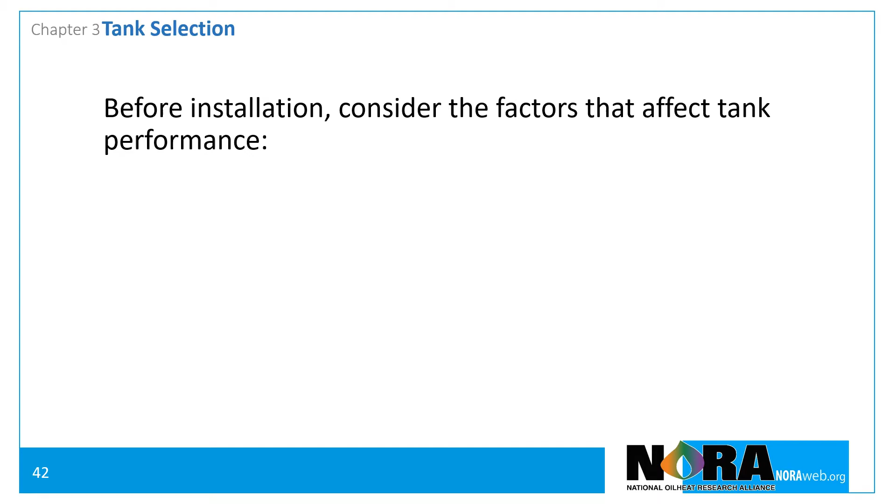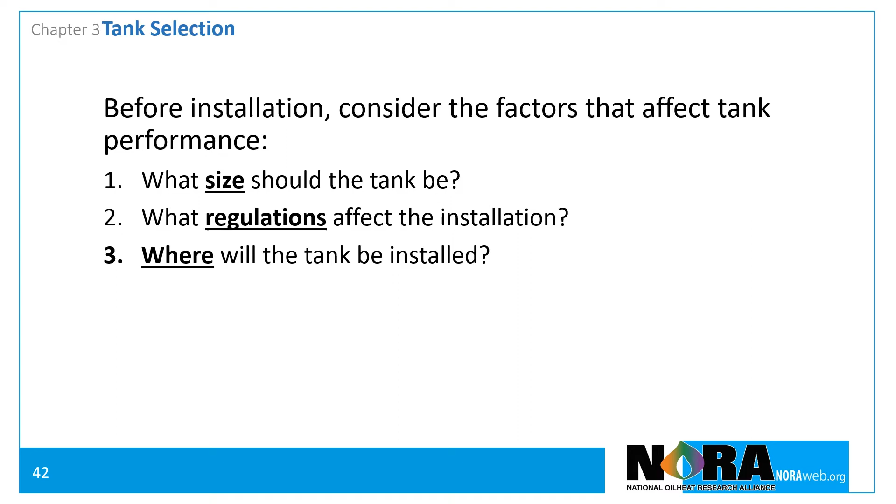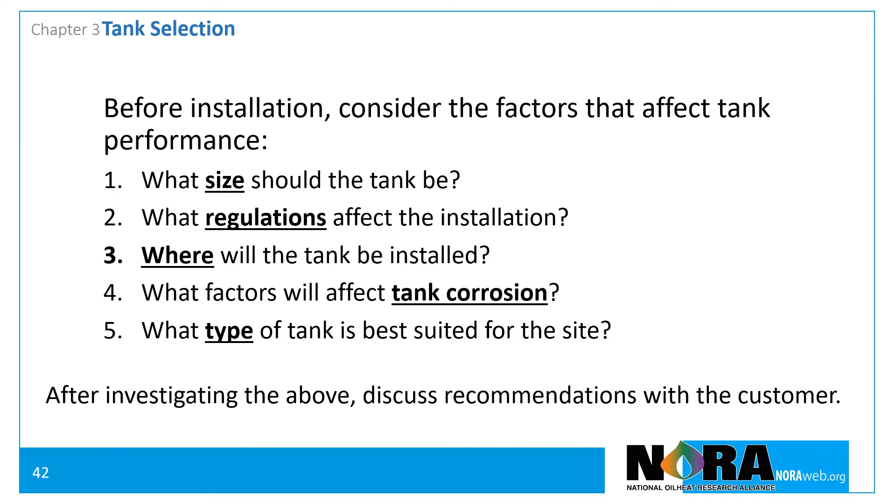Before installing a new or replacement tank, consider the factors that will affect the tank's performance over its service life. These may include what size should the tank be, what regulations affect the installation, where will the tank be installed, what factors will affect corrosion, and what type of tank is best suited for the site. After investigating each of these factors, discuss the options and your recommendations with the customer.

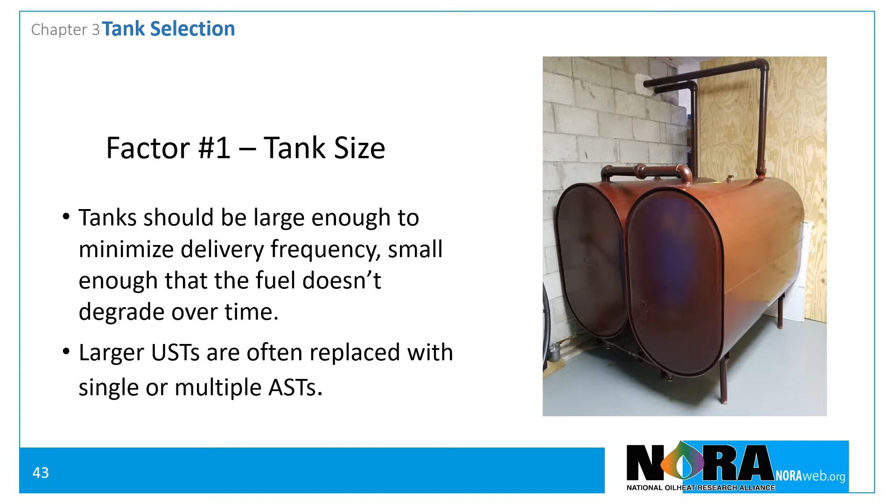Regarding factor number 1, tank size. Tanks should be large enough to minimize delivery frequency, and yet small enough so that the fuel in storage doesn't degrade over time. Larger underground storage tanks are often replaced with single or multiple above-ground storage tanks. Smaller tanks require more frequent deliveries, but they reduce the aging of the fuel.

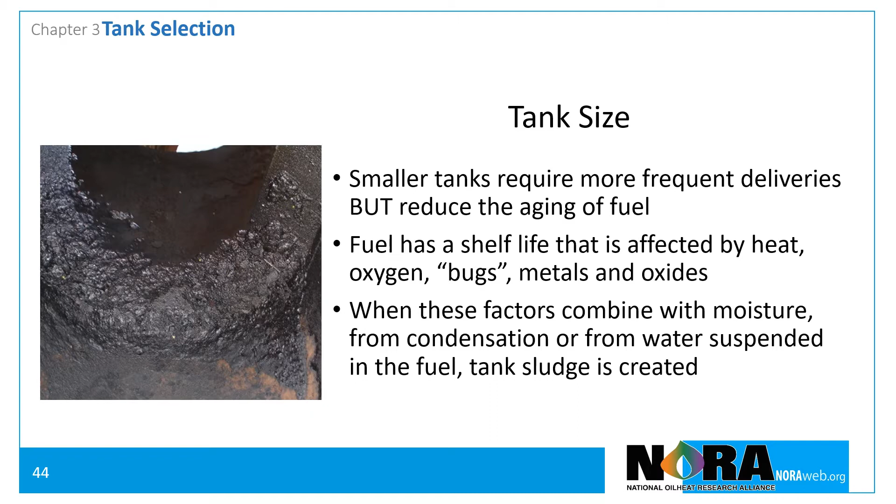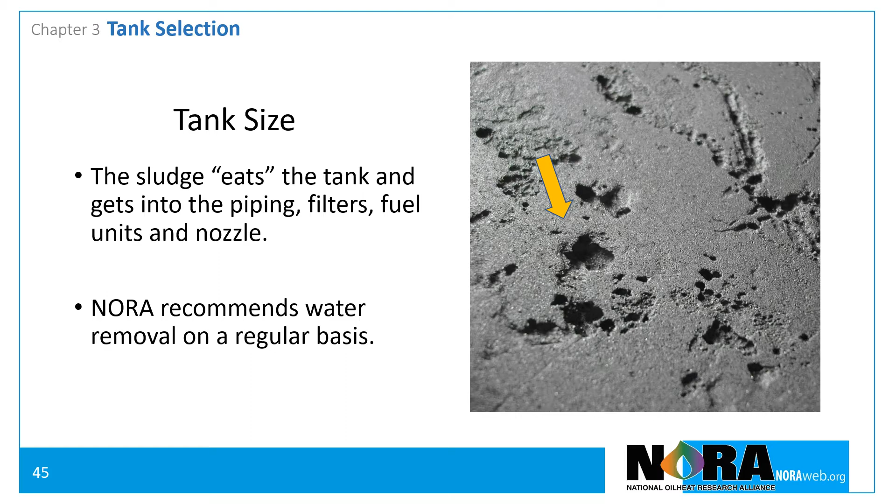Fuel has a shelf life that is influenced by heat, oxygen, microorganisms, metals, and oxides. When these influences combine with moisture, an environment for creating tank sludge is created. This sludge not only causes tank corrosion, it can get into the piping, the filters, the pumps, and the nozzle, causing operational problems. This is the primary reason regular removal of accumulated water is recommended throughout this course. Tank size should reflect the balance between delivery frequency and the time the fuel is stored.

NORA suggests that the best way to properly size a fuel storage tank is to divide the annual consumption by 3. For example, if a customer is expected to consume 750 gallons or less, 750 divided by 3 equals 250. A tank no larger than 275 gallons is recommended. If a customer is expected to consume 1,000 gallons, 1,000 divided by 3 equals 333. So a 275 or a 330 gallon tank will suffice.

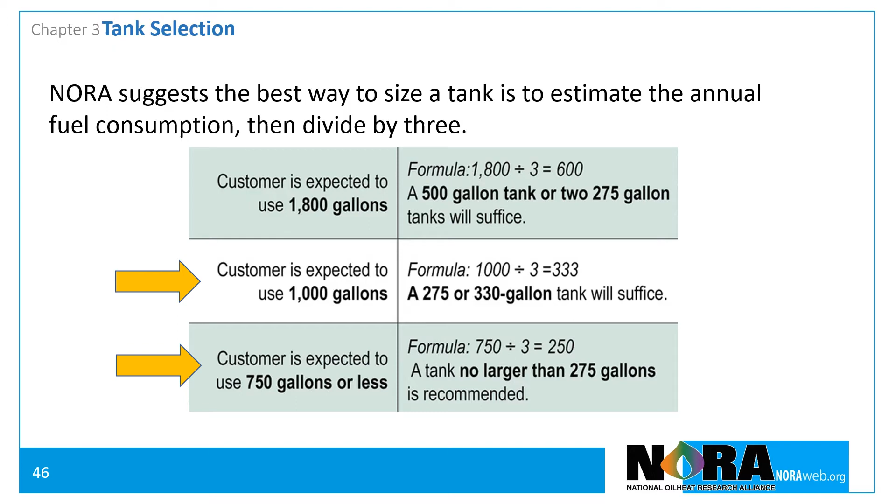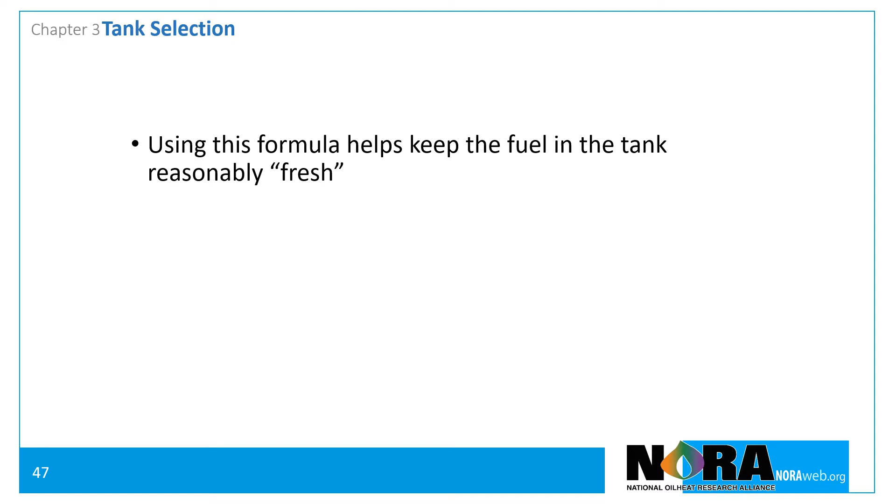Using this formula helps assure the fuel in the tank is reasonably fresh and resources are not challenged by excess deliveries. Keep in mind that even with this method of sizing, at any given time, some of the fuel in the tank will be over a year old. In the case of underground storage tanks, or an above-ground storage tank with the fuel supply line piped through the top, a portion of the tank contents, fuel residues, and oxidized fuel may be much older.

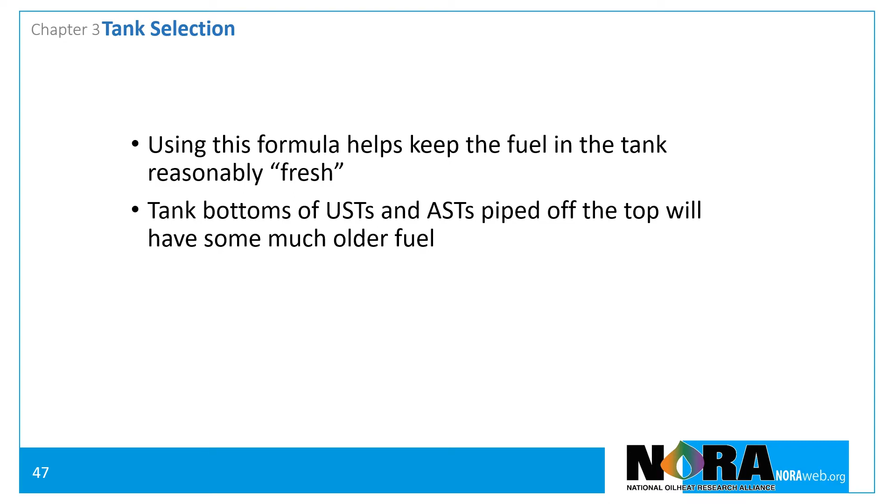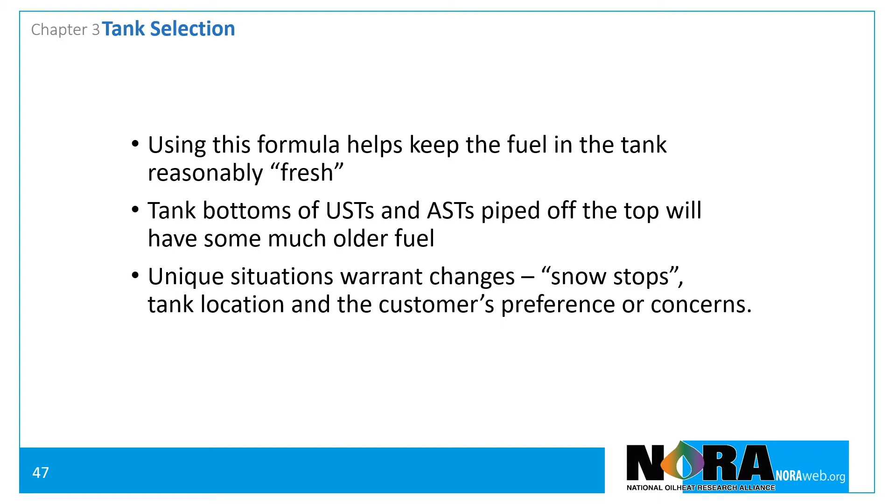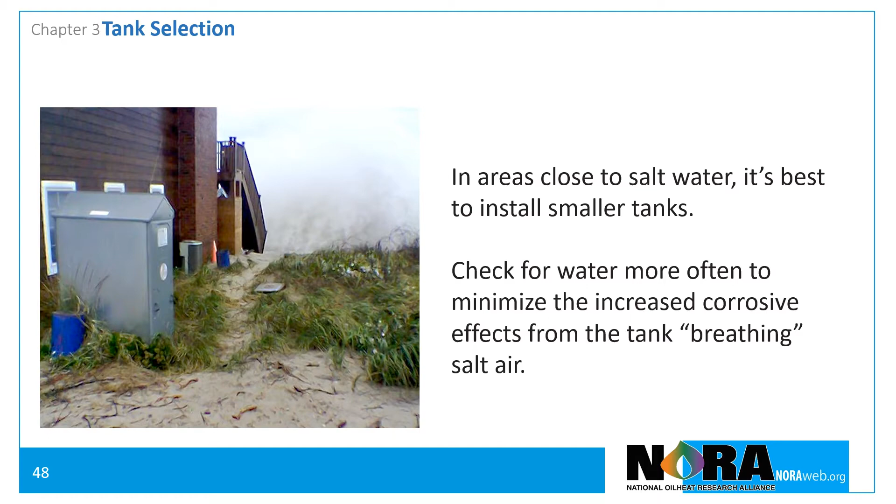Of course, there are unique situations which may warrant changes to this formula, including locations of the tank and the customer's preferences or concerns. In areas close to salt water, it may be prudent to install even smaller tanks and monitor for accumulations of water more frequently, in an effort to minimize potentially increased corrosive effects from the tank breathing salt air. The key is to balance delivery frequency with reasonable product turnover so aging of the fuel is minimized.

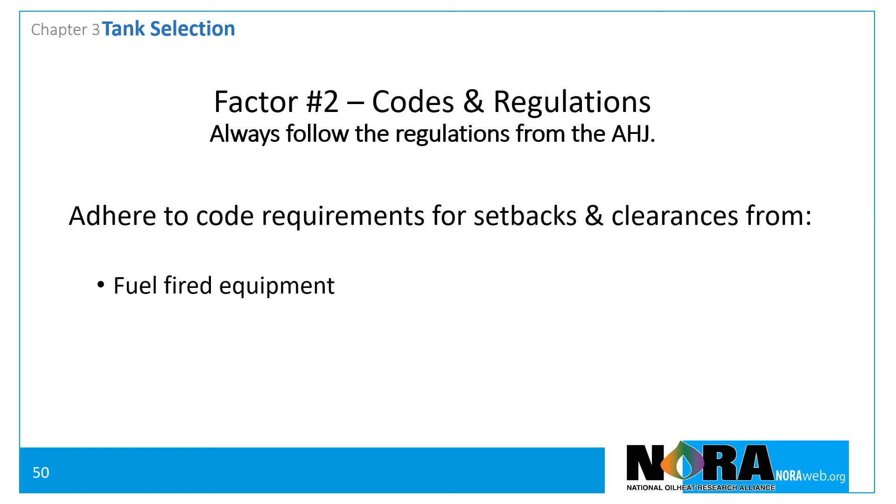Let's take a look at the second factor in choosing the right tank, codes and regulations. It is important to always follow the regulations from the authority having jurisdiction. Pay particular attention to required setbacks and clearances from fuel-fired equipment, including gas dryers, stoves, etc., property lines, buildings, including doors and windows, air intakes, gas and electric service ports, and combustion exhausts.

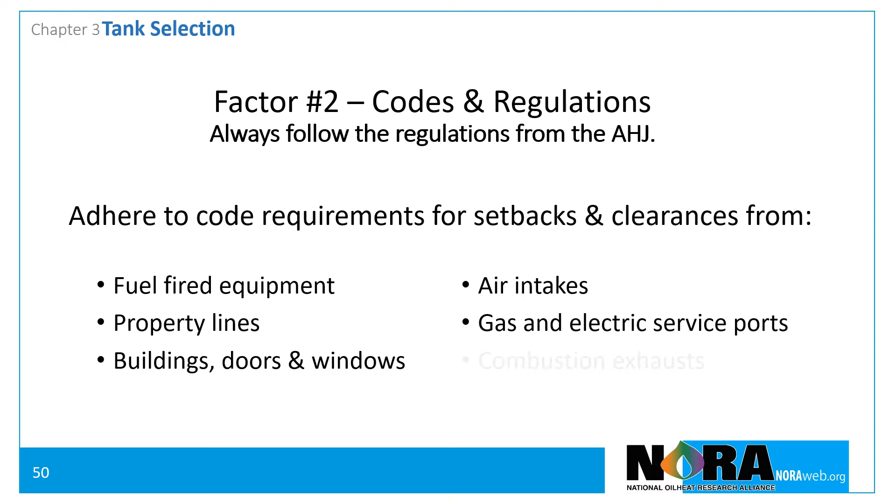The third factor in tank selection is its location. Tanks can be installed indoors or outdoors, and outdoor tanks can be installed either above the ground or underground. But where space and applicable regulations allow, NORA believes the benefits associated with indoor installations support a policy of installing tanks indoors whenever possible. The following things should be considered when selecting a location for a new or replacement tank.

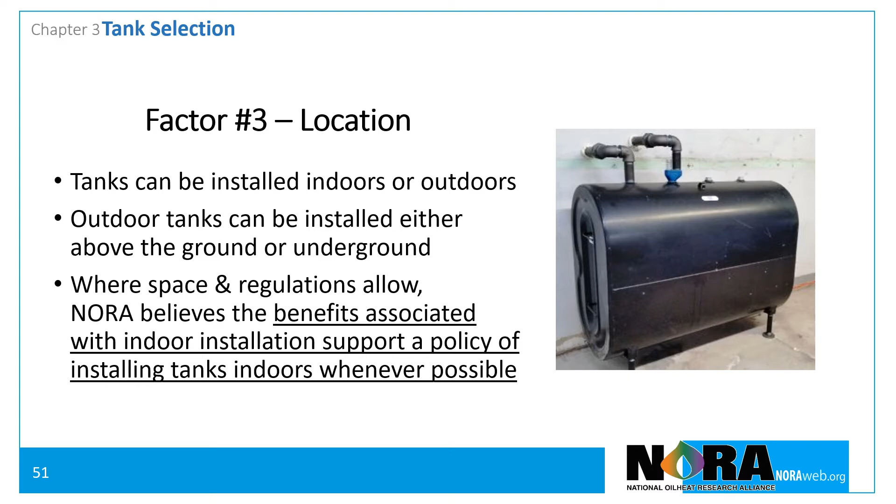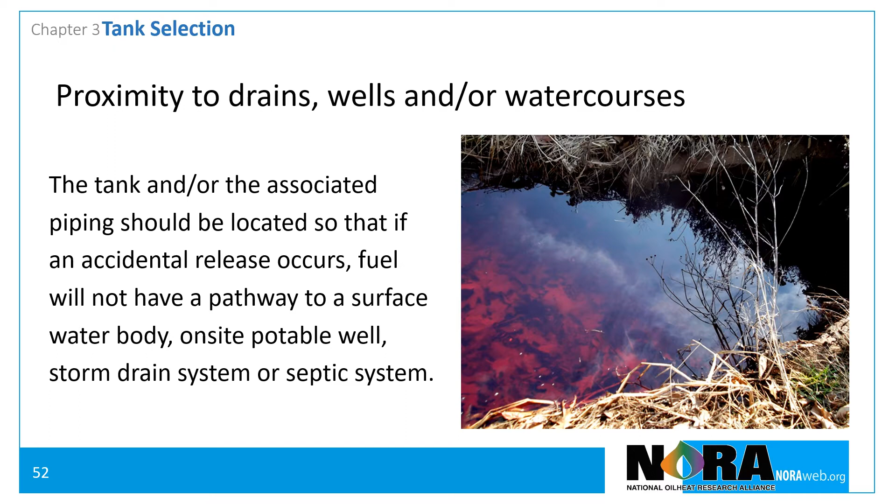The tank's proximity to drains, wells, and/or water courses. The tank and the associated piping should be located so that should an accidental release occur, fuel will not have a pathway to a surface water body, a potable well, a storm drain system, or a septic system.

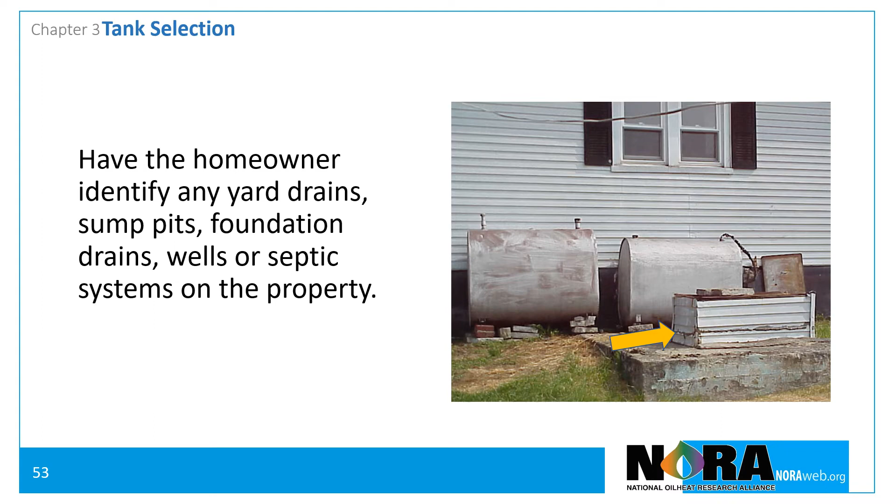Have the homeowner identify any yard drains, sump pits, foundation drains, wells, or septic systems on the property. In the picture here, the tank has a number of issues, and the white rectangular box on the concrete slab is a water well. These tanks should be replaced, and the new ones should be relocated and piped properly.

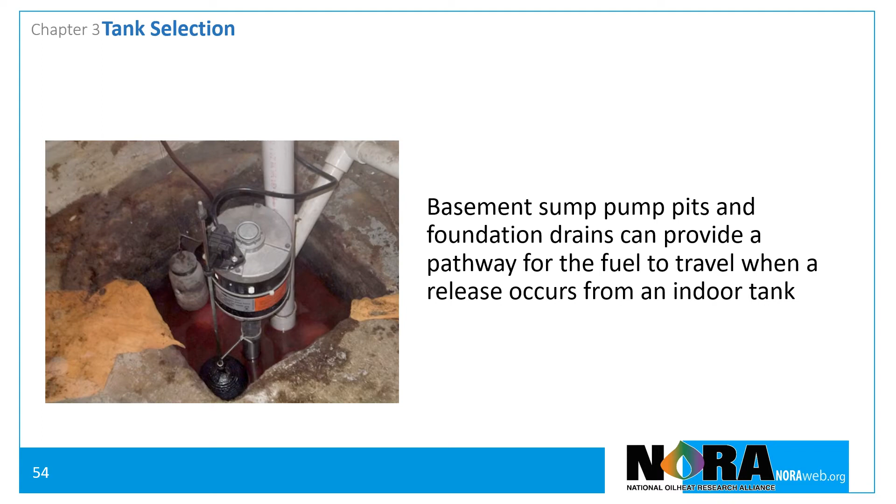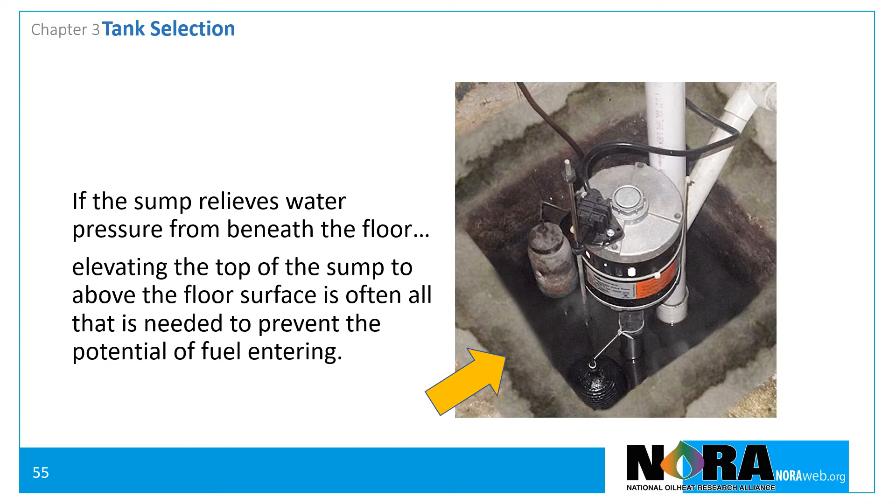Basement sump pump pits and foundation drains can provide a pathway for the fuel to travel when a release from an indoor tank occurs. Oftentimes, if the pump is relieving water pressure from beneath the floor, elevating the top of the sump to above the floor surface is all that is needed to prevent the potential of fuel entering.

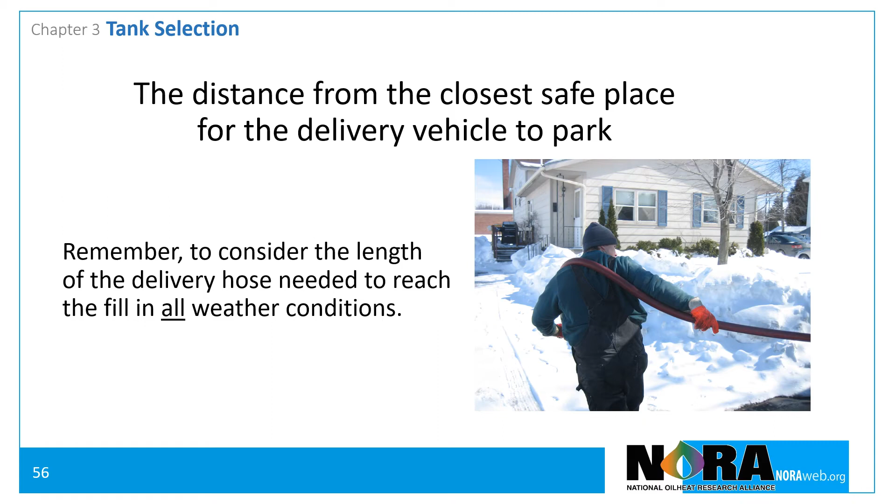A location criteria that is often overlooked is the distance from the closest safe place for the delivery vehicle to park. Remember to consider the length of the delivery hose and that the hose must be able to reach the fill in all weather conditions. Select a location where the tank and piping won't be subject to damage from weather and other physical damage.

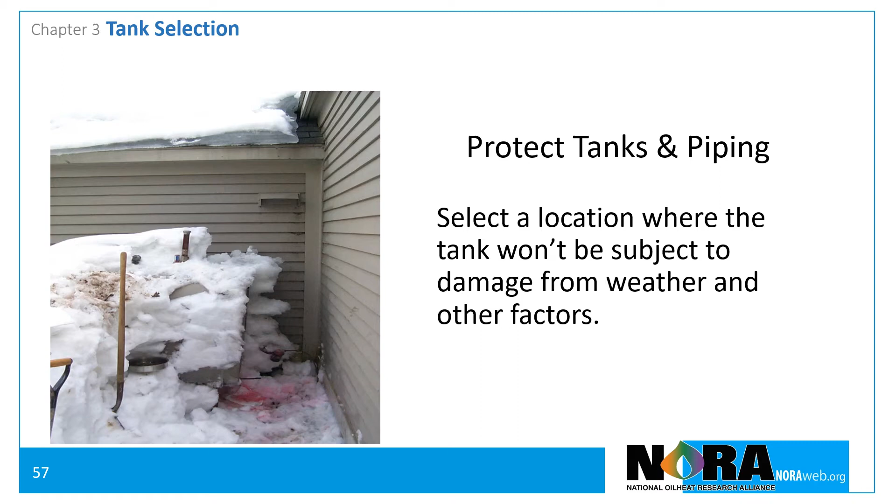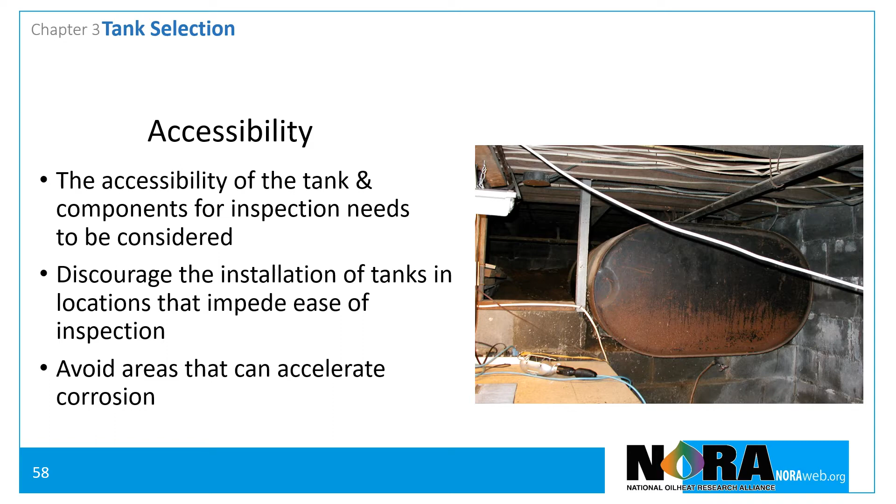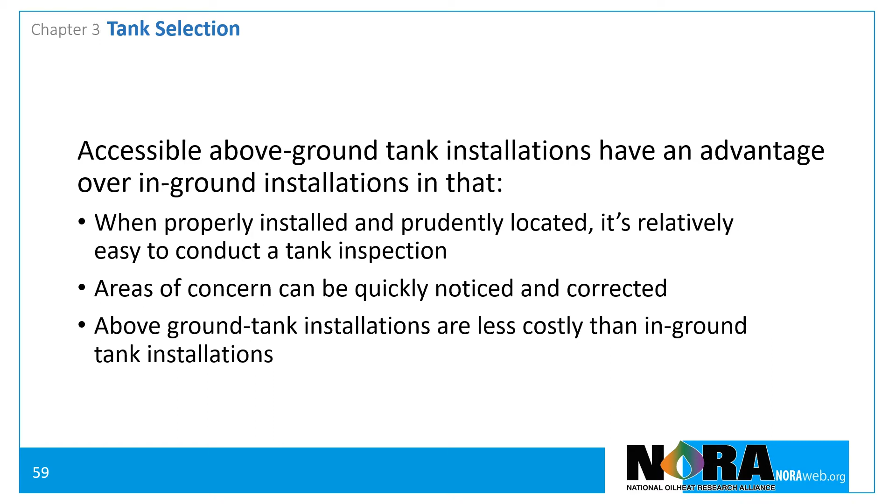The accessibility of the tank to facilitate inspection and servicing needs to be considered. Areas that may present the risk of accelerated corrosion should be avoided. Accessible above-ground tank installations have an advantage over in-ground installations in that it's relatively easy to conduct tank inspection, concerns can be quickly noticed and corrected, and above-ground tank installations are less costly than in-ground tank installations.

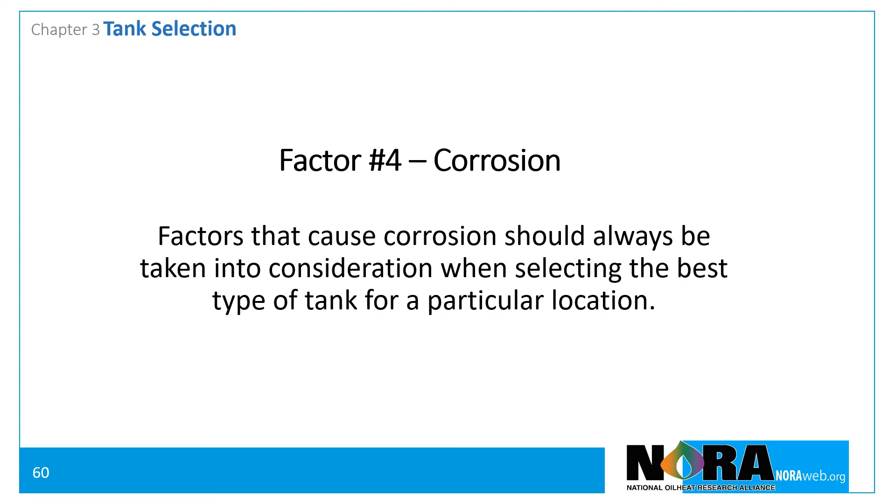The fourth factor in tank location is the potential for corrosion. Factors that cause corrosion should always be taken into consideration when selecting the best type of tank for a particular location. The National Fire Protection Association requires that underground storage tanks be protected from exterior corrosion by a properly designed,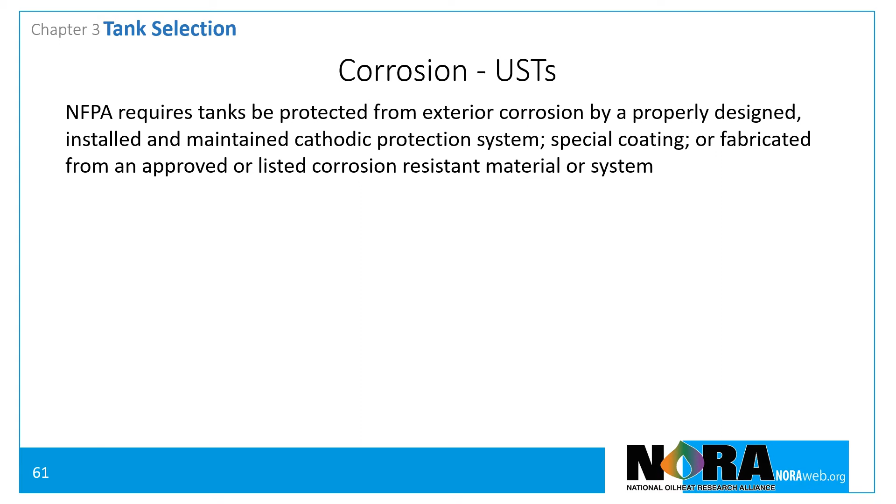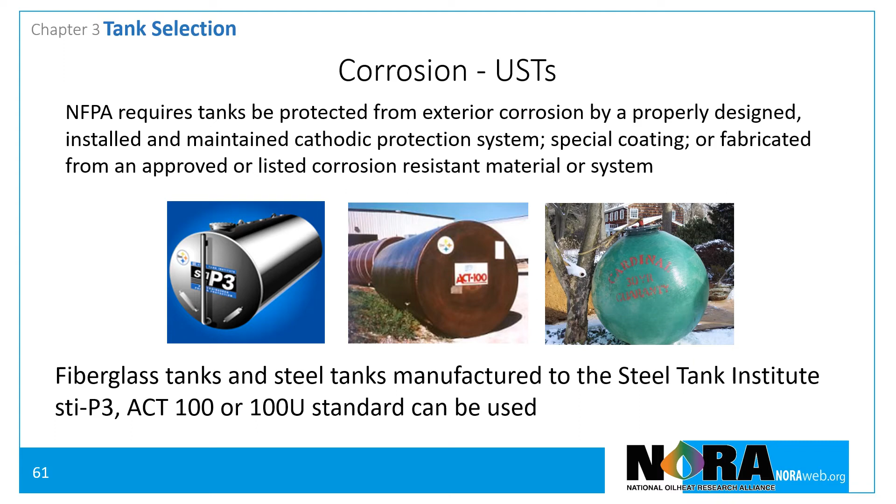installed, and maintained cathodic protection system, special coating, or fabricated from an approved or listed corrosion-resistant material or system. Fiberglass tanks and steel tanks manufactured to the Steel Tank Institute's STI-P3, ACT-100, and ACT-100U standards meet the requirement.

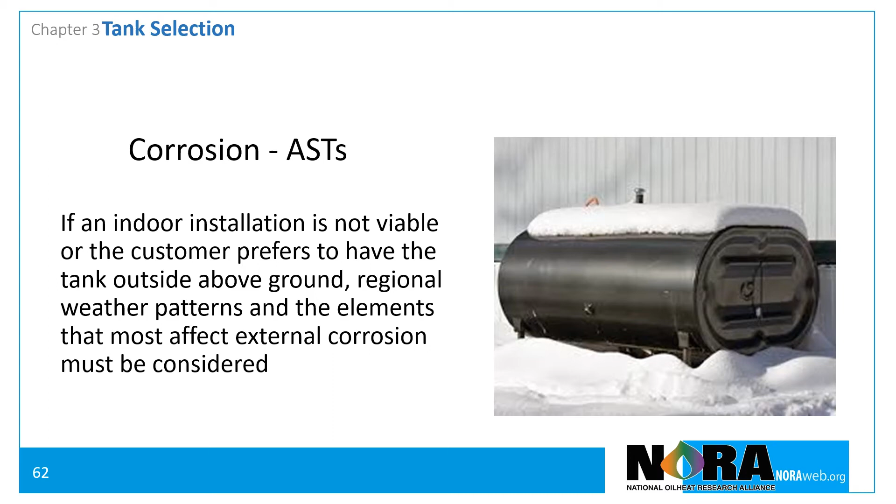If an indoor installation is not viable, or the customer prefers that an above-ground storage tank be installed outside, the location should be based on regional weather and the elements that most affect external corrosion. It's best to situate the tank where effects of radical temperature change can be avoided. A shady spot that has some protection from weather is ideal.

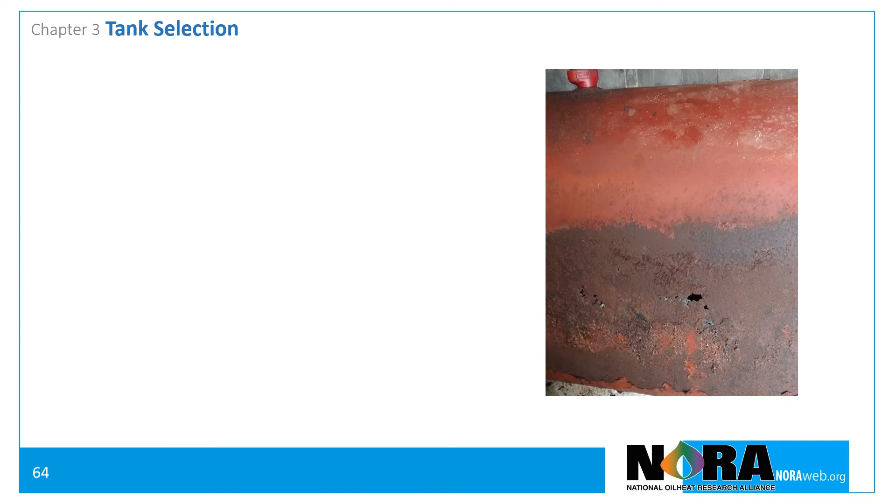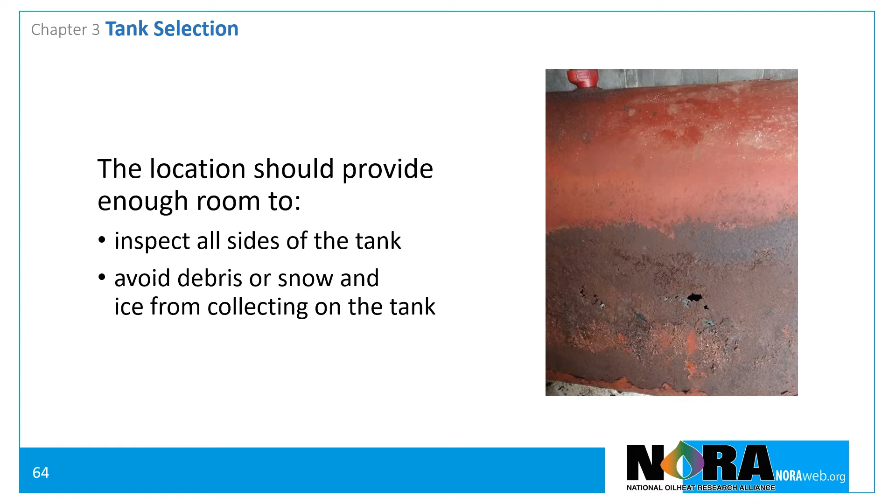The selected location should provide sufficient room to inspect all sides of the tank, sufficient room to avoid debris or snow and ice from collecting on the tank, and sufficient access to facilitate keeping the area beneath the tank free of debris. The tank in this picture was installed right against a wall.

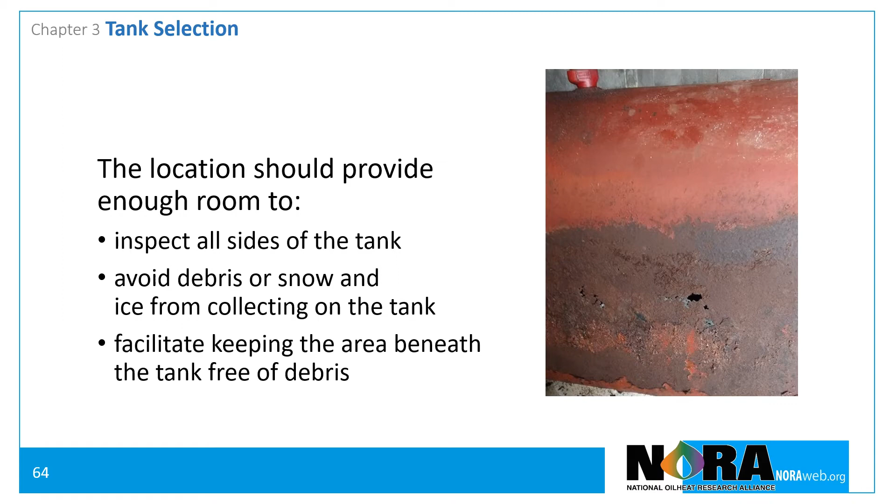While above-ground storage tanks normally corrode from the inside out, this tank was the exception to the rule because of an improper installation. In some instances, suggesting the customer consider having the tank installed within an enclosure, or recommending the customer consider a non-metallic tank system can help minimize the risk of premature tank obsolescence.

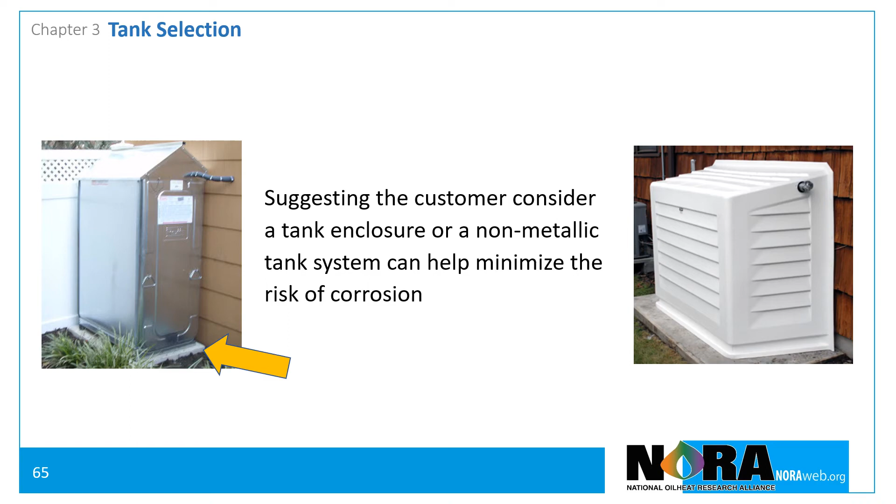The polyethylene steel tank in this picture appears to have some issues. The manufacturer's instructions say that the base should extend at least 6 inches beyond the edge of the tank, and that the tank should be a minimum of 2 inches from all walls to allow for expansion and inspection.

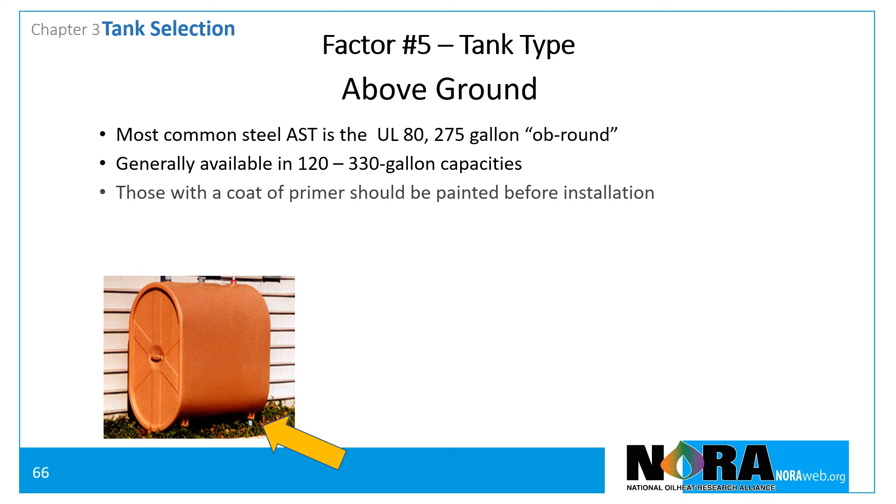Emergency vents are not required for combustible liquids, but UL142 tanks have a label attached that says, "Do not plug this tapping." Some authorities having jurisdiction have refused to approve installations when UL142 tanks used for fuel have a plug in the 3-inch tapping. There is no advantage to using a UL142 instead of a UL80, so it's advisable to avoid installing them. And the cylindrical tanks are also available.

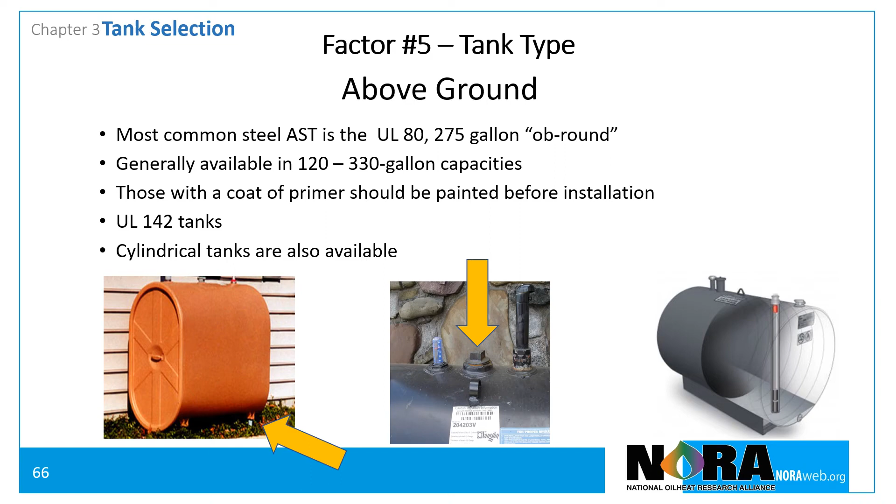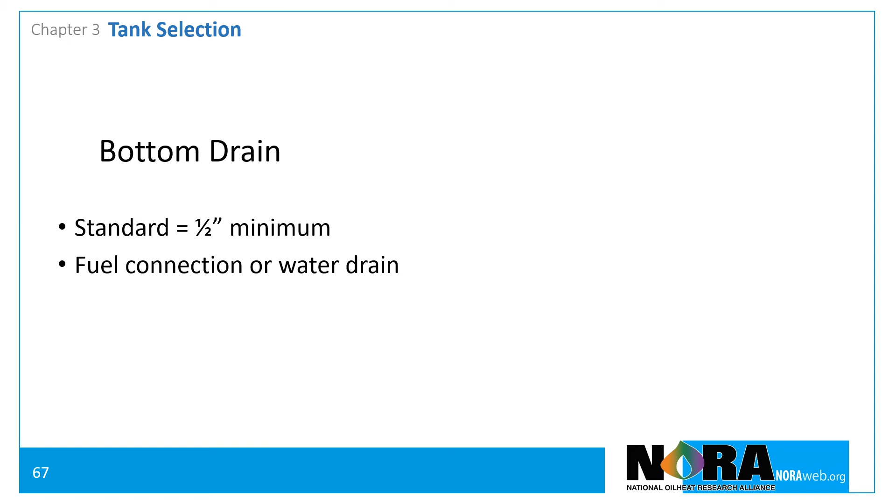UL80 tanks typically have a 1/2-inch outlet at the bottom of the tank. This tapping is normally used for the fuel supply connection. If it is not used for the fuel supply, it should be piped to facilitate water removal. Merely making the fitting liquid tight by the insertion of a plug defeats the purpose of the design. This image shows a manufacturer's illustration of how this tapping should be connected.

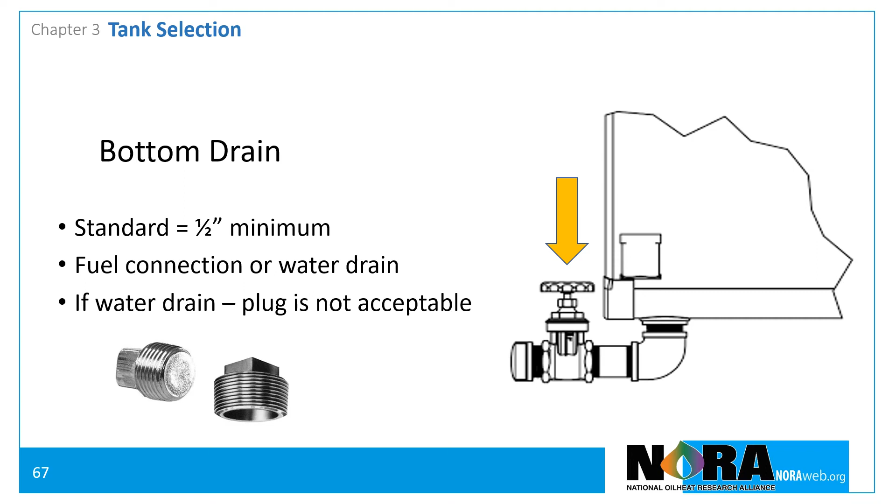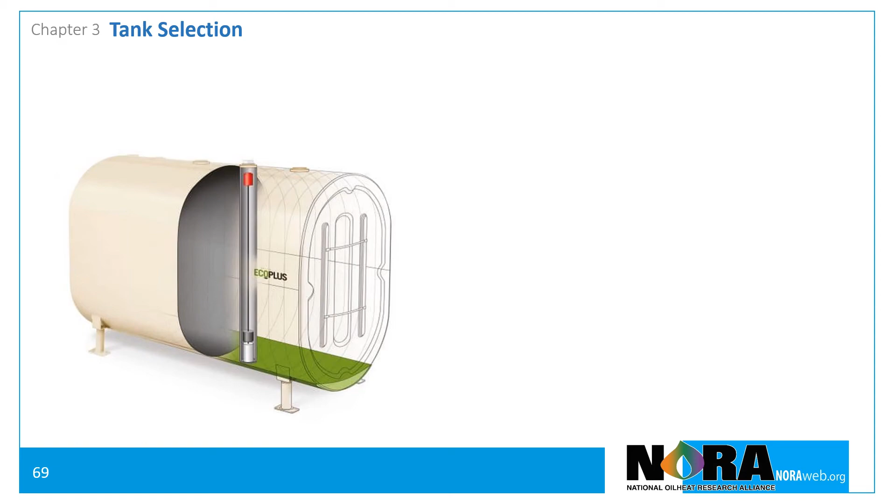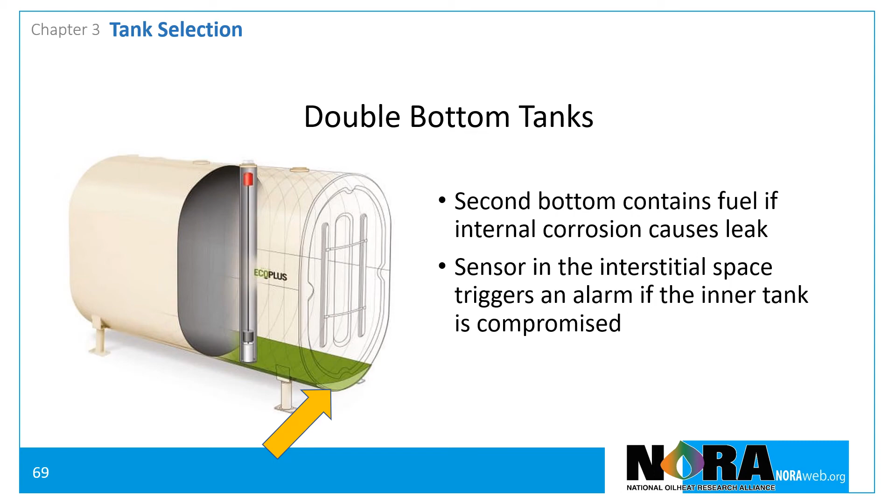Above-ground storage tanks are available with a polyurethane coating to better protect the outside of the tank against rust and corrosion. Another improvement to the UL80 tank is the double bottom tank with leak detection. These tanks have a second bottom to contain a leak should the internal corrosion create a breach of the steel integrity. A sensor installed in the interstitial space triggers an alarm and provides an alert that the inner tank has been compromised.

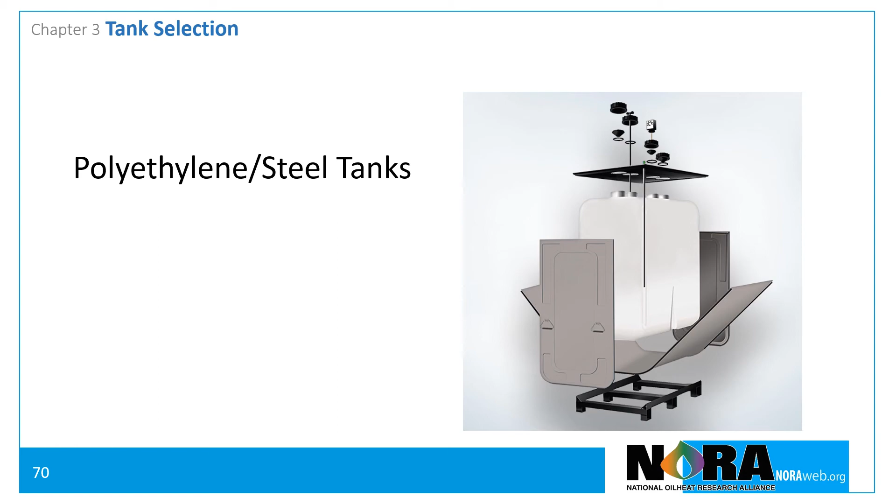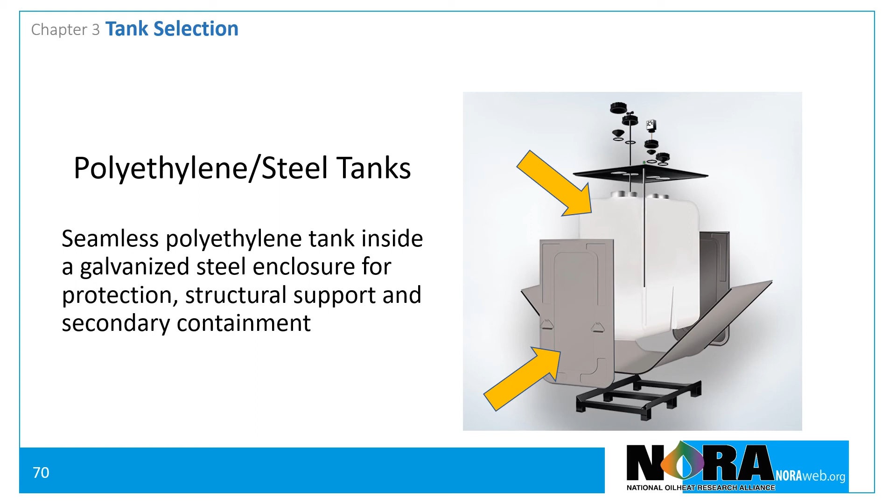Polyethylene steel tanks are comprised of two separate but integral units. The primary internal storage tank is constructed of a seamless polyethylene, which is both compatible with heating fuel and is not electrically conductive. Thus, it is not susceptible to the electrochemical mechanics of corrosion. This tank is within a secondary galvanized steel enclosure which provides structural support for and protection of the polyethylene tank while providing secondary containment should the polyethylene tank leak.

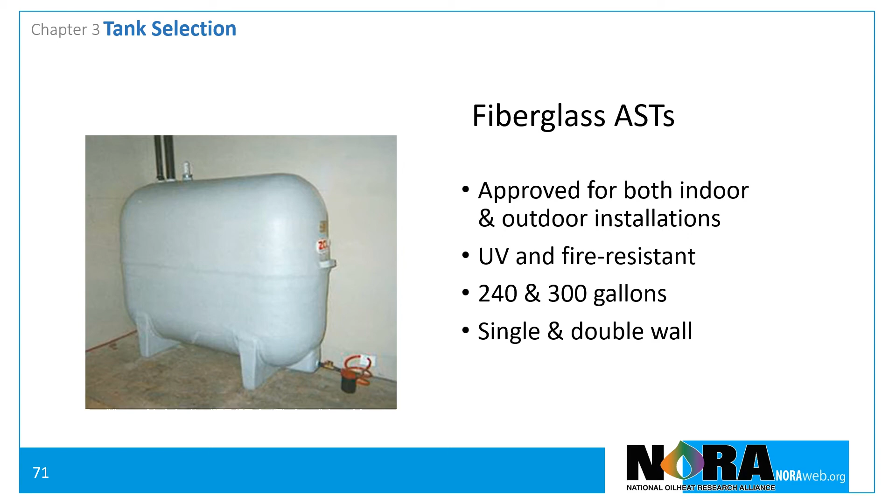And fiberglass above-ground storage tanks are available for both outdoor and indoor applications. These are UV and fire resistant and they do not corrode. They are available in 240 and 300 gallon sizes and both single and double wall construction. The double wall model has a visual sight glass to facilitate inspection.

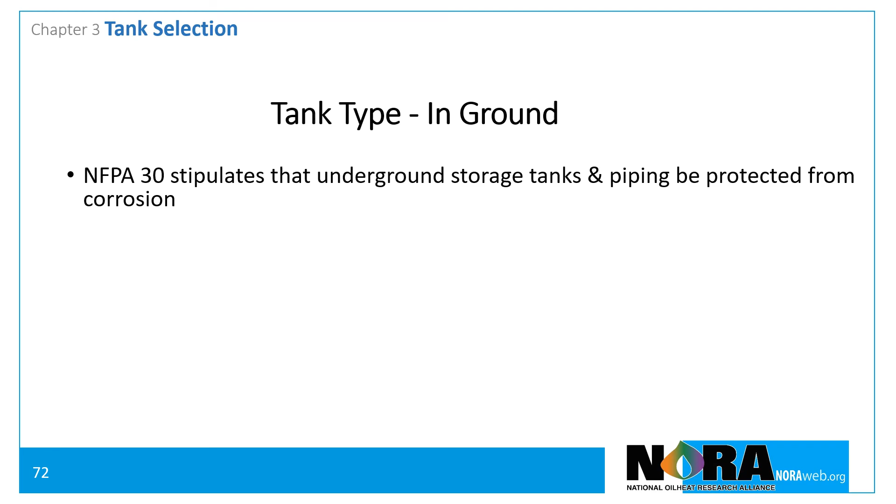This section addresses underground storage tanks that are currently available. NFPA 30 stipulates that underground storage tanks and their piping be protected from corrosion. Unprotected steel tanks are not compliant with the requirements of the major code bodies. While these tanks provide many years of secure storage, age combined with the inability to visually inspect them resulted in tank failures along with other issues that are addressed in this course. For underground installations, NORA recommends 7-gauge STI P3, ACT 100 or fiberglass tanks.

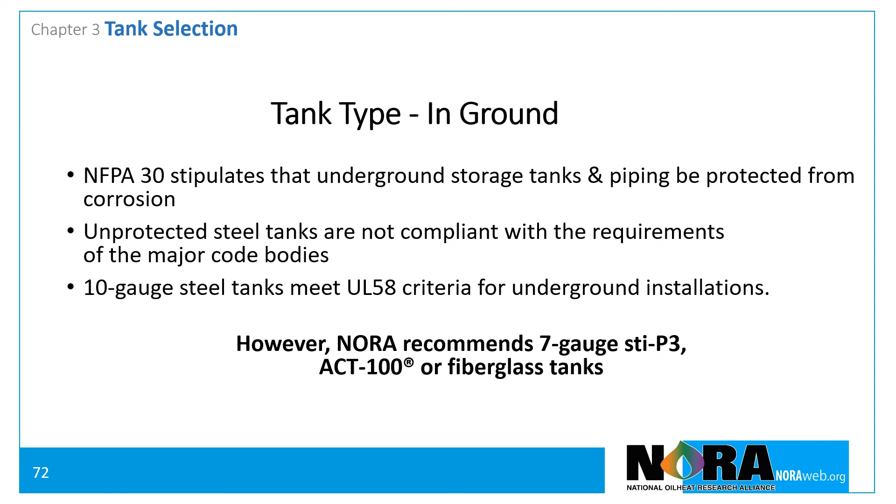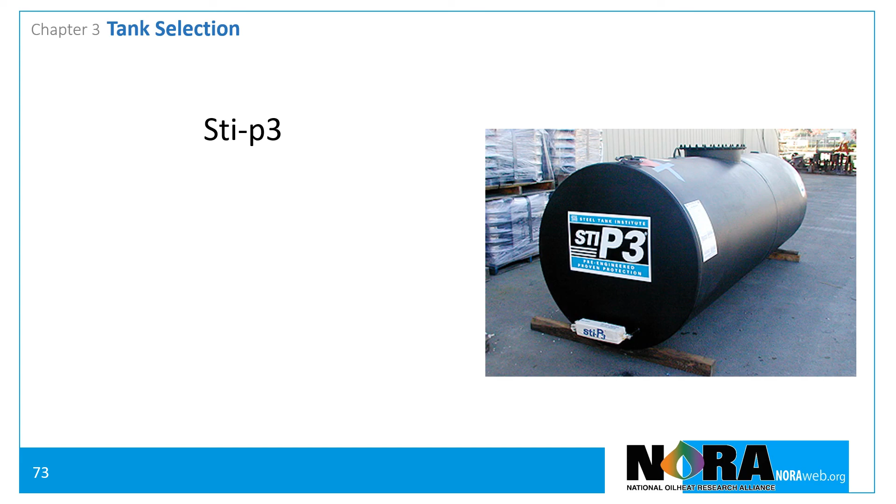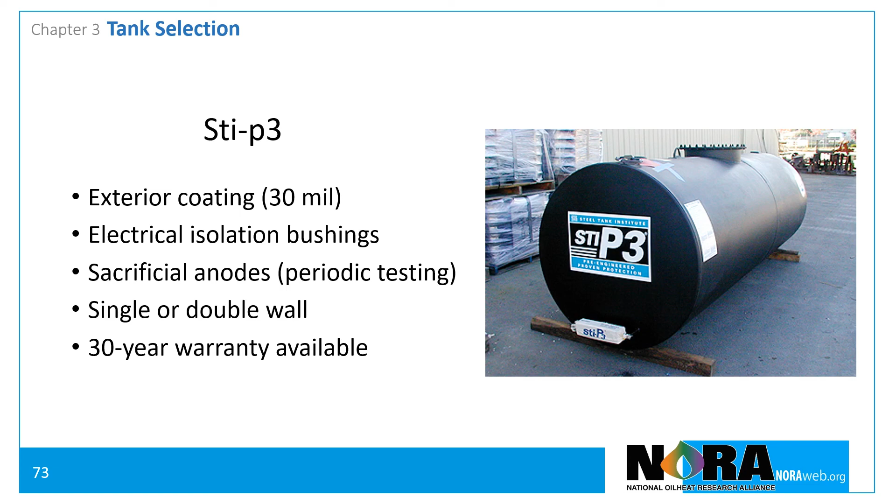STI P3 tanks are steel tanks protected with a factory-installed corrosion protection system designed by the Steel Tank Institute. These tanks feature a 3-part protection system: an exterior dielectric coating, factory-installed electrical isolation bushings in the tank fittings, and sacrificial anodes designed to provide protection of exposed steel in the event of an isolated coating failure. The sacrificial anode protection needs to be tested at installation and periodically thereafter. STI P3 tanks are available in single and double wall configurations, and they carry a standard 10-year warranty against failure due to corrosion, and a 30-year warranty is available.

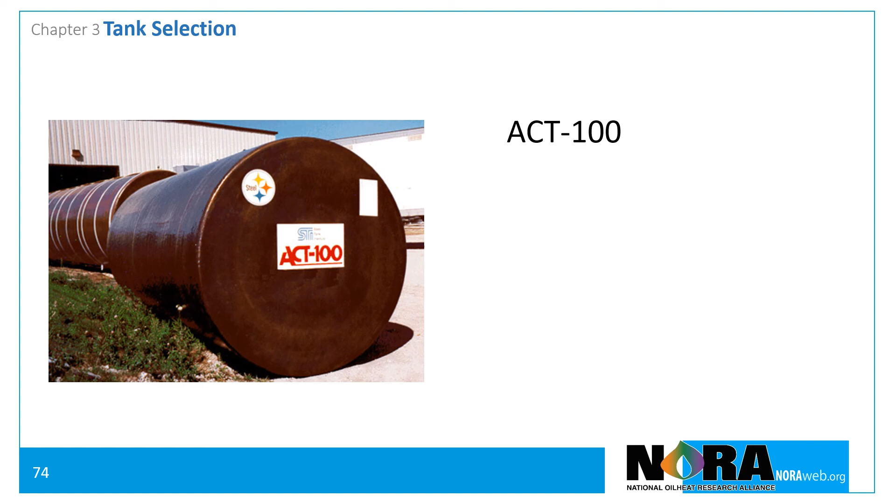The ACT 100 tank uses an advanced multi-component fiberglass reinforced plastic coating applied directly to the exterior of the steel tank to provide corrosion protection. Since the 100 mil high-impact abrasion-resistant coating is significantly thicker than the coating of an STI P3 tank, these tanks do not come equipped with sacrificial anodes. ACT 100 tanks are also available in single or double wall configuration.

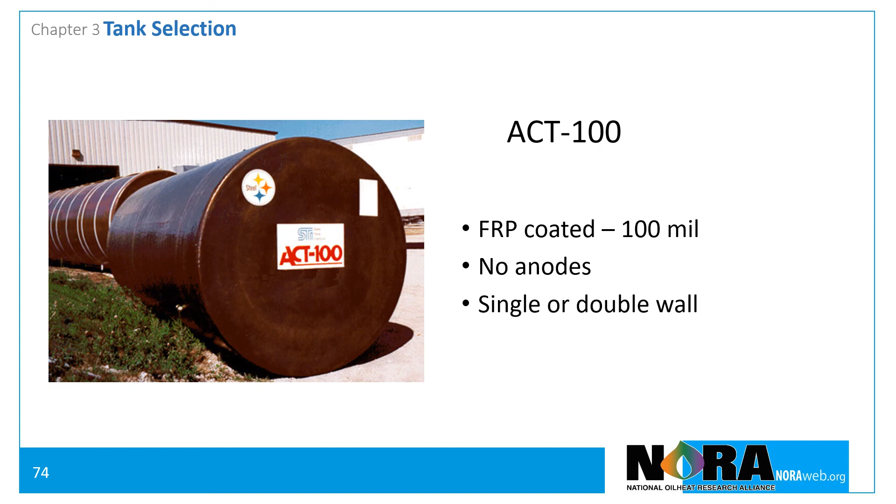The ACT 100U is another version of a coated steel tank. In this case, a 70 mil coating of urethane is used to isolate the steel from the electrochemical mechanisms of corrosion. Like the ACT 100, the tank is not equipped with sacrificial anodes and is reliant on the superior coating for corrosion protection. The urethane is thinner and softer than the FRP coating of the ACT 100, so a protective material is installed beneath the tank to cushion it on the backfill. The ACT 100U is also available in both single wall and double wall configurations.

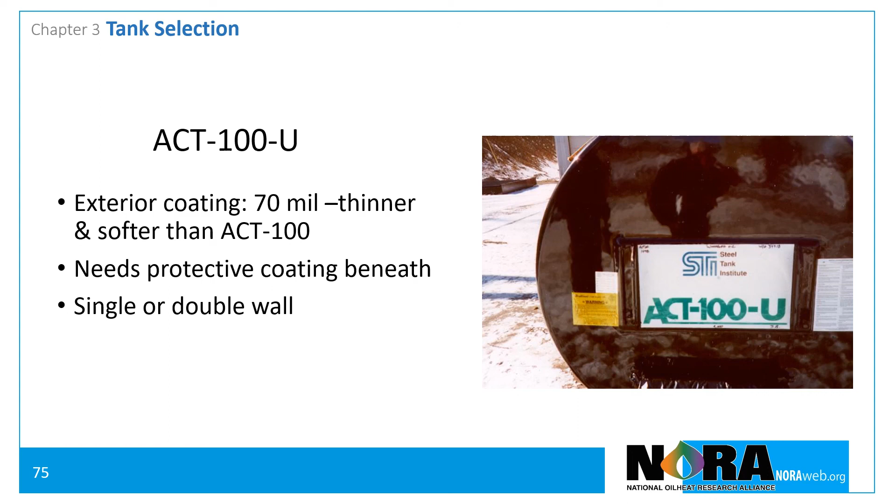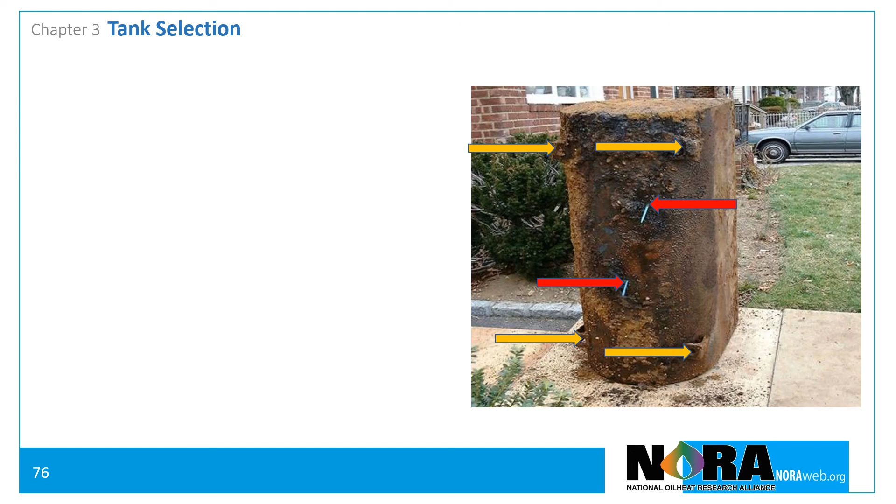Above-ground storage tanks are much thinner than underground storage tanks, and they don't have the coatings to protect them when installed underground. Underground storage tanks require backfill to provide support. So do not install an above-ground storage tank underground, and do not install an underground storage tank above ground.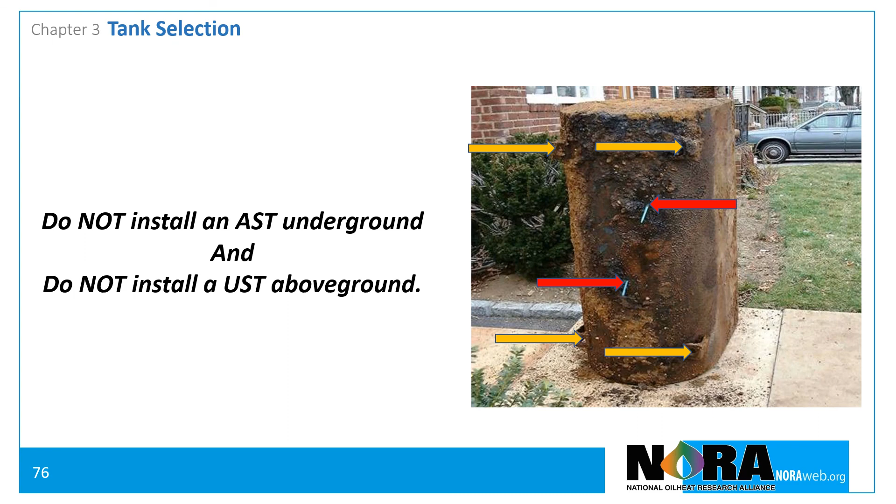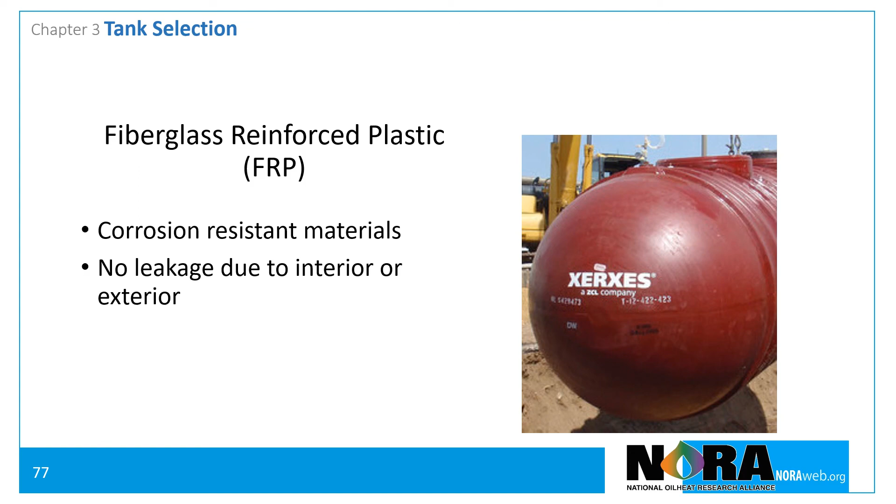Fiberglass reinforced plastic, or FRP tanks, are available in the U.S. for underground installation. FRP tanks do not rust because they are made of corrosion-resistant materials, eliminating the possibility of leakage due to either internal or external rusting. FRP tanks are available in single and double wall configurations.